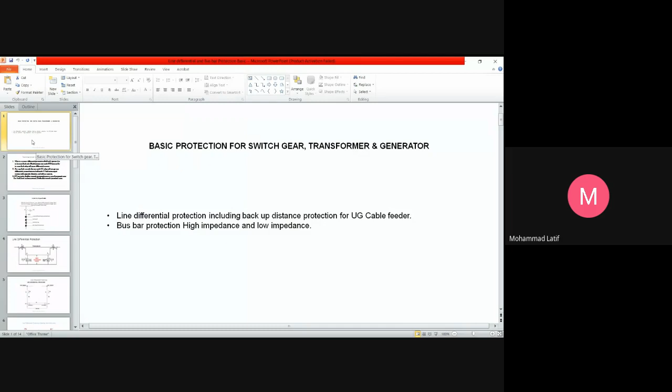Actually, today our topic was line differential protection, including backup distance protection for underground cable. For underground cable feeder, main protection is line differential, backup is distance. I add here busbar protection also, because line differential protection is only one protection, so it will be very short. Busbar protection criteria and operating characteristic are also similar. That is the reason I add also busbar protection. Busbar protection is common everywhere.

Line differential protection depends; on low voltage generally they are not using it, but in Abu Dhabi lines we are using line differential. This is unit protection. What is the meaning of unit? It is related to some particular unit, not for all the things. That means it is also restricted to some particular zone. A zone here means the underground cable zone. If there is an overhead line, main is distance, backup is differential.

Generally, we are using differential because we need the communication. Sometimes for 33 kV lines, there is no communication, that means OPGW, which is fiber optic communication. That is the reason main is distance. Our criteria for the line differential relay: there will be two relays, one in the sending end, another in the receiving end. Say for example, sending substation and receiving substation, there is a 132 kV or 220 kV cable feeder. Distance is 20 kilometers, for example.

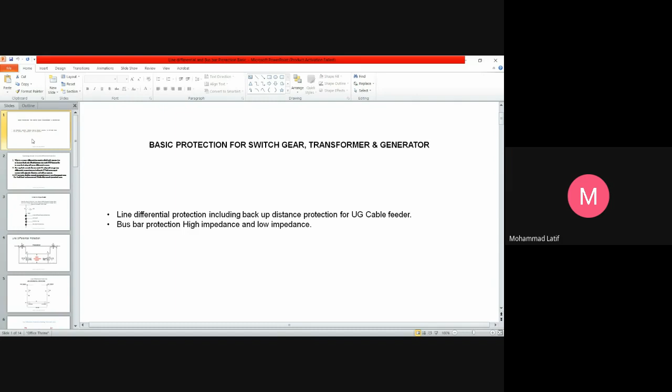We will have one relay in the sending end. We should have another relay in the receiving end. These two relays should communicate with each other. What is the reason? One relay will sense current and voltage from the sending end. That relay will send through the fiber optic to the receiving end, so that the receiving end will come to know how much current is sent from the sending end, and whether the same current is reaching the receiving end or not. Actually, there's a lot of things. First of all, I will go from here: which CT we should use for what type of protection?

That is related to the switchgear operation and interlock. I think we will not discuss it here. If anybody is interested, at the end we can discuss. We will go for the protection.

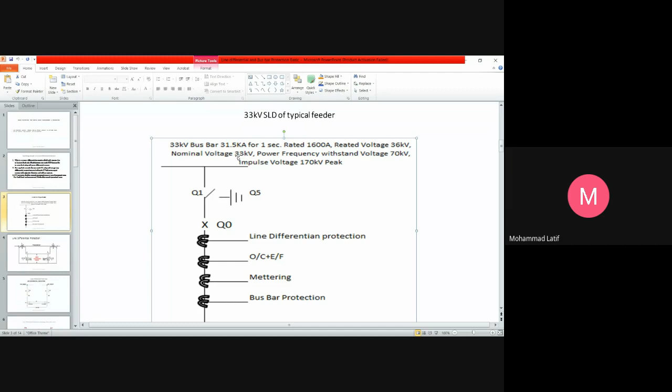Anyhow, insulation voltage: we have to keep in mind nominal operating voltage is 33, but rated should be 36 because voltage sometimes can be plus minus, little higher or lower. That is the reason rated is high. Power frequency withstand, this is called BIL, basic insulation level. This basic insulation of the bus bar is proved by two. What is that? One is power frequency, that is RMS value, 70 kV. Another is peak value, impulse voltage, that is 170 kV peak. Anyhow, this is the rating we have to keep in mind always.

Now we will come to basic operating principle. What is that? This is a current differential protection which will operate due to in-zone fault only. That means fault between two end CTs. I will show from the figure. Because for in-zone fault, relay will sense differential current. How, that will be explained. For any fault outside the two end CTs, relay will not get any differential current because both end CTs will sense equal current with opposite direction and will not operate.

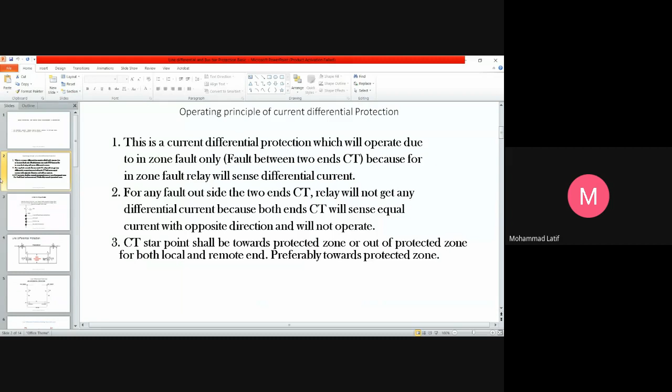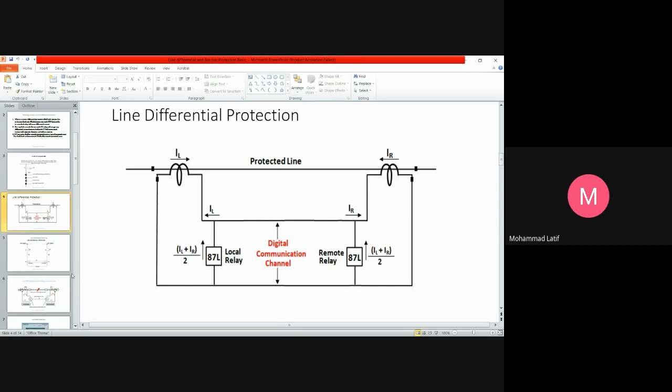Now here is an important point for the line differential. How is this line differential sensing current from one end to another end? Where I have shown FOC, optical fiber. Let us go to this screen. You see, this is the current flowing. Now, this cable is our protected cable, protected feeder. So current is flowing from this feeder and going to the other feeder. In that case, this CT will sense current, and this CT also will sense the same current because it is the same feeder. How will the line differential relays in two ends communicate? This is the fiber optic cable.

It is not our conventional copper wire, so that current will flow directly as an analog value. No, this is a fiber optic, and we cannot keep this much long copper cable because it will give more burden to the relay, and the relay is connected with the CT, so it will give more burden to the CT, and the CT will saturate. It is 20 kilometers apart or maybe more than that.

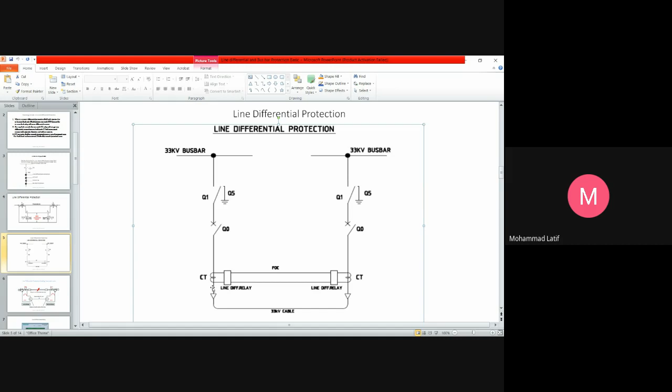If you keep it on, what will happen? Even if the relay basic setting is 0.2, it will not operate with this current, because the charging on operating region will be high. Say relay setting is 0.2, it is operating at 0.25 ampere. But if you keep the charging on, it will go maybe more than 0.5, because charging on means it will consider the charging current as a differential current, then it will not operate.

So actually this is a numerical relay, a lot of programming is possible. We can include a lot of things in the relay by programming. So this is the criteria, I already explained very clearly. These are two critical points: what is the charging current effect,

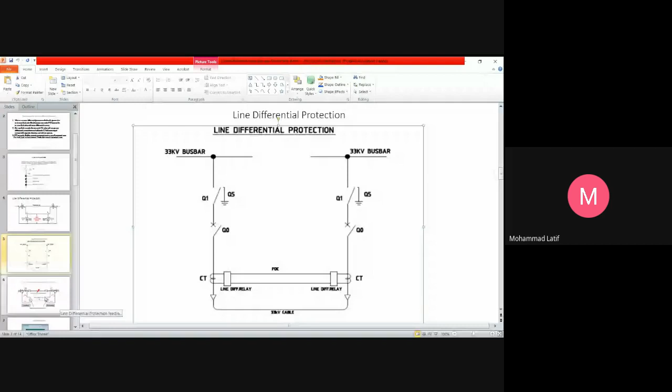what is the transmission delay effect. Generally, I have seen even at ABB, a lot of engineers working, if we ask them questions in the interview, many know how to do it, but why it happens many people cannot explain. So we have to know from the basics up to more and more details of the protection. It's not easy. And each and every protection you have to consider independently. One cannot depend on the other. Okay, this is the line differential.

What is the time now? Okay, how long do we have time?

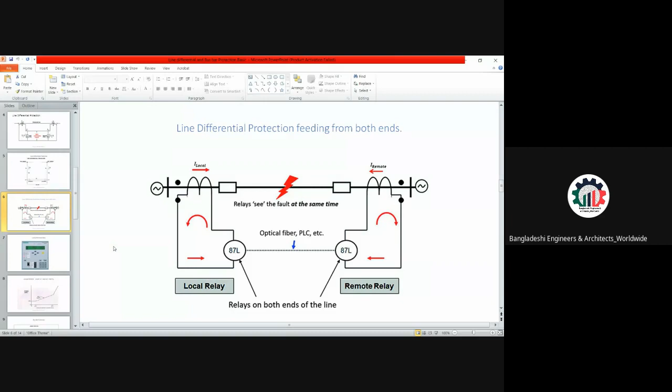So actually our Mr. Mujibur Rahman asked me a question. This is the basic setting. It is shown here 0.5. Generally it is not 0.5. We are keeping it low, 0.2 or 0.25. This is the basic setting. After that, the slope started. You see, operating current is in this axis. Differential current is operating, restraining current is in this axis.

What is restraining? It will restrain the relay from operating. Operating means it will operate. It is differential current, and it will cause the operation of the relay. Now, why are we keeping this slope? Generally, when there is an out zone fault, if any CT is saturated, that CT output will be reduced. So one CT is giving proper output, the saturated one is giving less output. So there will be a differential current.

That is the reason, to prevent relay operation for the out zone fault when any of the CTs is saturated, we are giving this slope. This slope is making the operating region high. You see, if you consider this point, this slope is 40%. I think everybody knows what the slope is. This slope is this vertical divided by this horizontal.

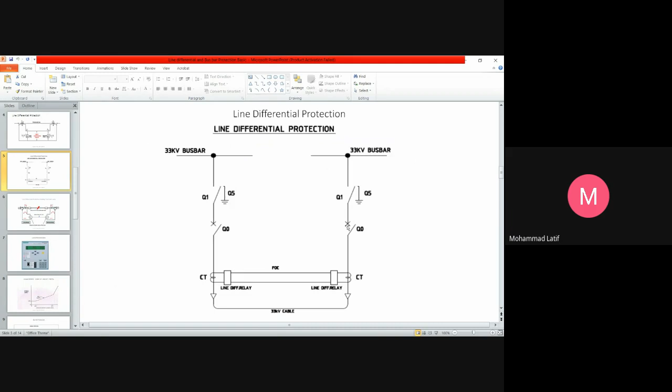There is another region with very high current, a flat region, that is called unrestraining. That means when there is a very high differential current, one CT is open circuit. So I need to trip the feeder because I need to de-energize the primary of the CT because it is open circuited. That is the reason there is one unrestrained region like that. It did not come here actually.

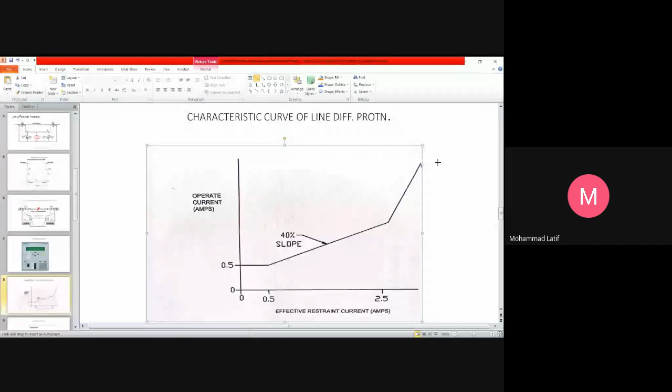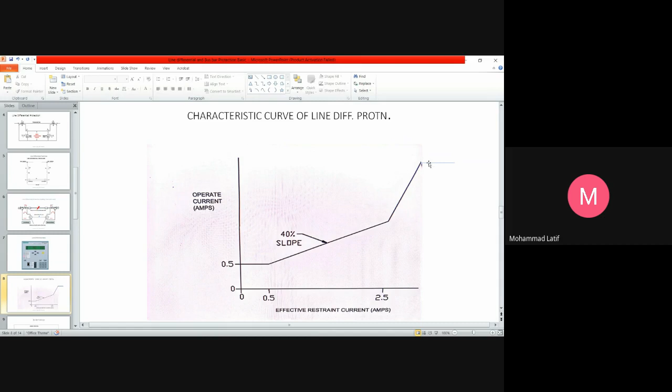Unrestrained. I don't know, it was not there, actually during editing. This is where the unrestraining region will be. Let me see. Actually, the unrestraining region will be like that. Because there is a very high primary current and the CT is open circuited, so it will operate. It will not give any restraining. Direct. Whatever the restraining current, the operating current here is fixed. So this is called the unrestraining region.

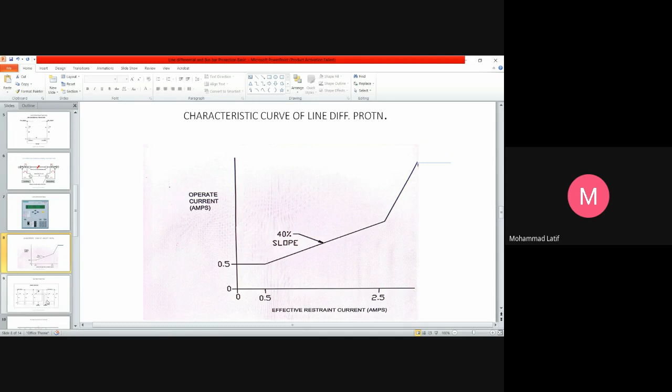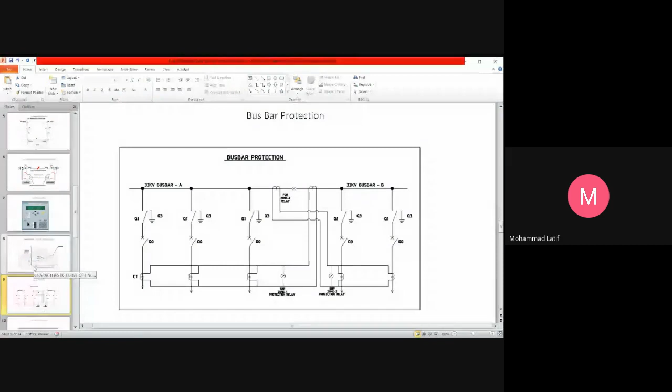We'll go to the busbar protection. Before going to the busbar protection, actually we should know very clearly what CT will be connected here. Generally, for any current differential relay, a class X CT is recommended, because a class X CT will have very low composite error, means ratio error, and the CT will be able to take more connected burden.

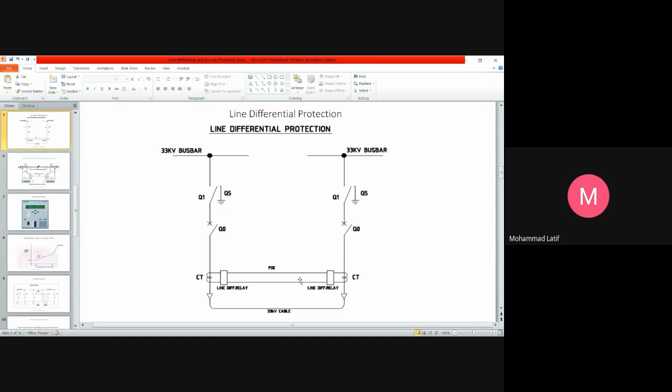You can see on the class X CT nameplate, you will get only the CT knee point voltage and the CT secondary winding resistance, but no burden will be there. Burden will not be mentioned for class X CT. That means you can connect more burden to the class X CT. And the ratio error is very less. That is the reason we are selecting class X or PX CT for any current differential protection.

Because current differential, by the name you can understand that it will operate by the differential current from different CTs. Differential means definitely you should have two or more. Then it will be differential, meaning the difference between two or more quantities of current. That is the reason the values collected from all the CTs should be correct.

That is the reason ratio error should be less and the same class of CT will be selected. One CT class PX, another 5P20 is not good actually, because ratio error will be different. So there will be differential current in normal operating condition, which is not expected.

Because the criteria of protection: it should be more stable during normal operating condition, but it should be more unstable, means sensitive, during fault condition. This we have to keep in mind. Protection should be more sensitive during fault condition and more stable during normal operating or normal load condition. Load in electrical means current.

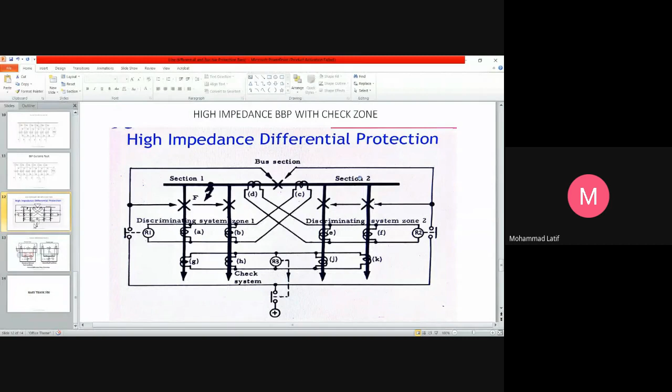And there is testing of this relay, that is more details. Oh, okay, one point here. This is the last point. Why is CT polarity required? Say this CT, here we have drawn the single phase, but there is a three phase. I think the three phase connection I don't have. Let me see. No. Anyhow, the three phase connection is not there, but I will show from here also why it is required.

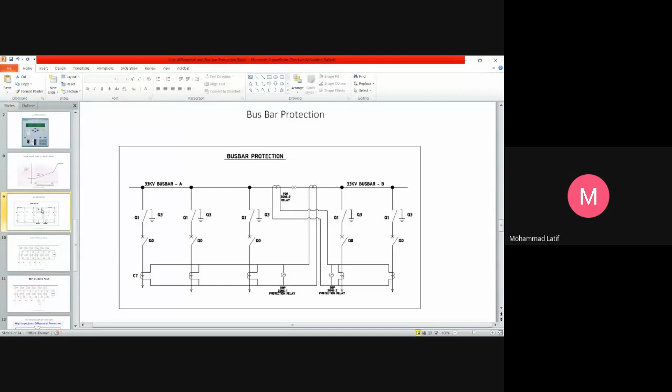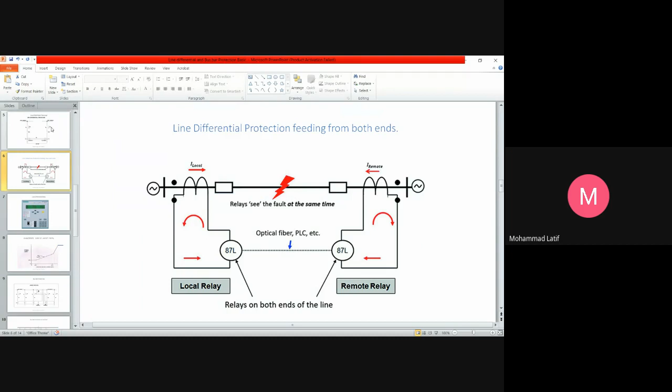That means CT star point should be on the same side. Say this CT star point is here, this CT star point is here. That means one is towards the busbar, another is towards the line. So the polarity will be wrong. This polarity of the CT is most important for current differential, also directional overcurrent. Most important, we have to keep in mind.

Okay. So CT star point should be on the same side, either in the protected zone or out of the protected zone. Generally, we are preferring towards the protected zone. That means star point here and star point here, not one in the busbar side, another in the line side. Actually, there are two types of marking of the CT. One is P1, another is P2. Say if it is P1, then the down one will be P2. S1 will be towards the P1, this is secondary.

P1 means primary, P means primary, S means secondary. Now if P1 is here, S1 will be this one. If P2 is here, S2 will be this one. Now for both CTs you have to connect the same way. Say now my S2 is towards the line. So the star point should be formed by the S2 in both CTs. If one is S1, another is S2, polarity will be wrong. The polarity is most important for current differential relay. So we have to keep proper polarity.

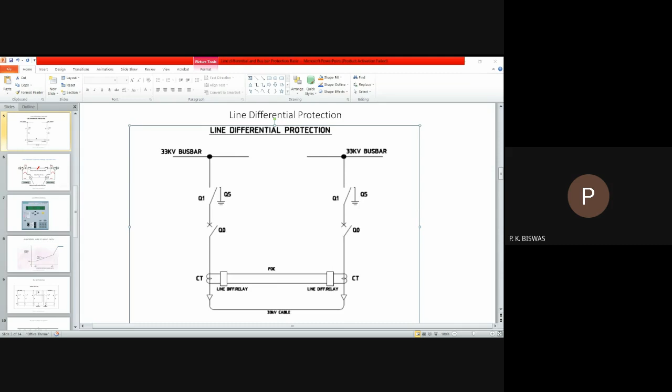After the lockout. Yeah, lockout will activate. Auto recloser will go to the lockout. You are right. In the third closing, lockout will activate.